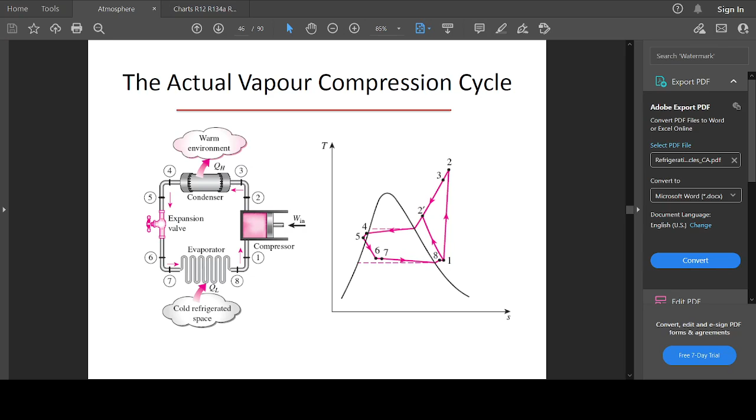Okay guys, continuation on the refrigeration cycle. So we stopped at the properties of refrigerant last time, so we continue on this lecture from here.

So what are the key properties of refrigerant? The first is the latent heat of vaporization. A refrigerant with high latent heat of vaporization is preferred. For a given capacity, a high value of latent heat of vaporization indicates that a smaller amount of refrigerant will be circulated and required per unit time, accounting for a smaller amount of refrigerant being used in the system.

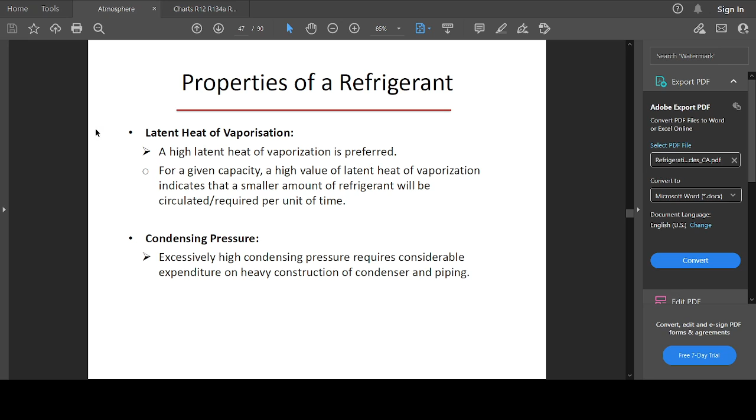Then what about the condensation pressure? Excessively high condensation pressure requires considerable expenditure on heavy construction of condenser and piping. Therefore, we need a refrigerant with a better condensing pressure quality.

What about the freezing temperature? The freezing temperature of a refrigerant should be below the evaporation temperature. And the critical temperature, the refrigerant should have sufficiently high critical temperature, as above the critical temperature the refrigerant vapor cannot be liquefied. So when using air-cooled condensers, the critical temperature should be above the highest ambient temperature expected.

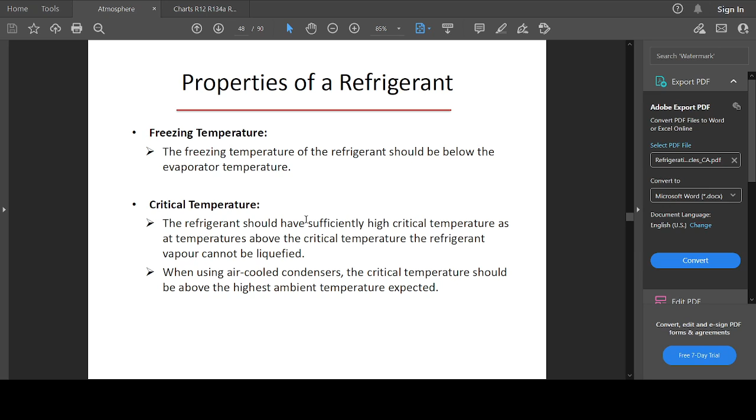The toxicity, a refrigerant obviously should be non-toxic because it helps with minimizing the level of toxic materials in circulation in terms of food handling, and in any case it gets released in the environment, it should be a material that is non-toxic, as it could cause harm and issues to people in contact with it, or animals.

Corrosiveness, the refrigerant should not be corrosive, because the materials used in the construction of the refrigeration system wouldn't last long if the refrigerant is corrosive. So the materials for the evaporators, the condensers, and even the compressors will be affected if the refrigerant which flows through these materials is corrosive.

What about flammability? The refrigerant should be non-flammable, so it should be a compound or chemical that is non-flammable. Chemical stability should be a chemical that is not reacting, an inert chemical, or one that will take lots of work to get it to react. So a compound that is chemically stable will be preferred.

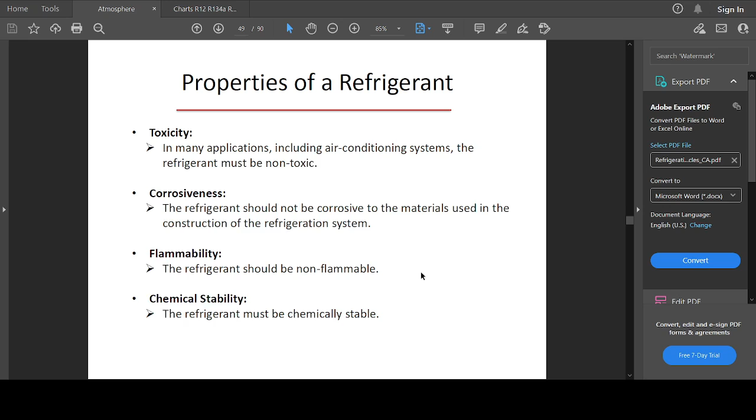So if a leak develops in the refrigeration system, the detection of such a leak should be easy. A refrigerant that makes detection very easy is preferred to one that doesn't.

So what about the cost of refrigerant? Obviously, in industrial application, a low-cost refrigerant is preferred.

And environmental impact, we touched on it with toxicity as well. It should be... although historically most refrigerants have compounds that could harm the environment, there are some refrigerants which have better performance with respect to causing harm to the environment, due to their properties.

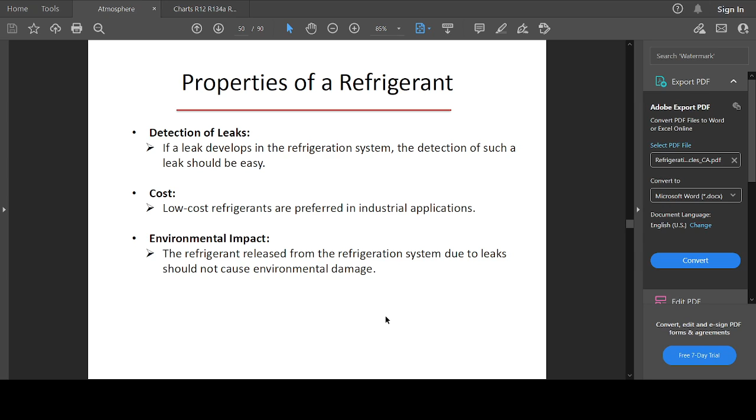So this is a standard designation given to some of the common refrigerants used in the market. We have the halocarbons. The halocarbons are the halides from the periodic table, made up of chlorine, fluorine - we know the chlorofluoro effect on the environment. The halocarbons are listed with refrigerant numbers R12, R22, R30, R114, R134A.

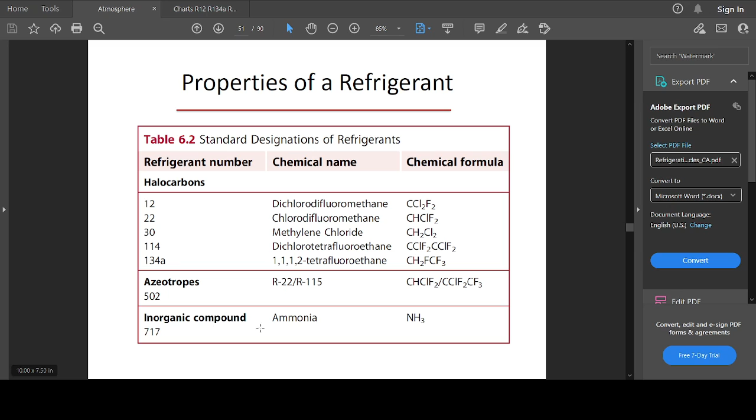So these are the corresponding chemical names and formulas for these refrigerants. Then the azeotropes are given as R502, with chemical names R22/R115, and the chemical formula given as this. The inorganic compounds, which is R717, is mainly ammonia, and the chemical formula for ammonia is given as this.

None of them is flammable apart from ammonia. Ammonia is the most flammable one, and it has an acrid odor. So if you are to detect a leak, you can use the odor to identify if there is a leak in the system.

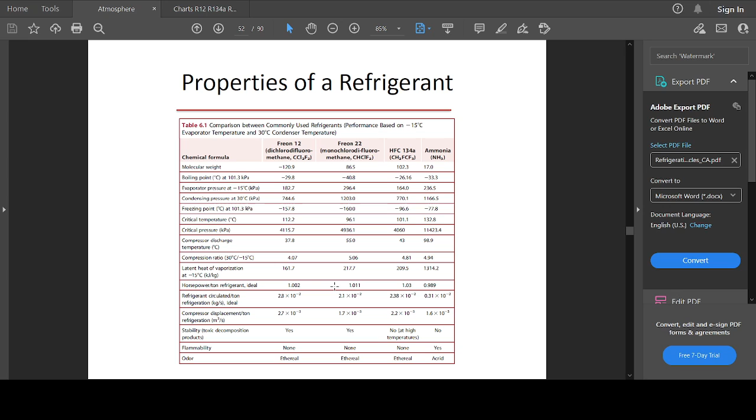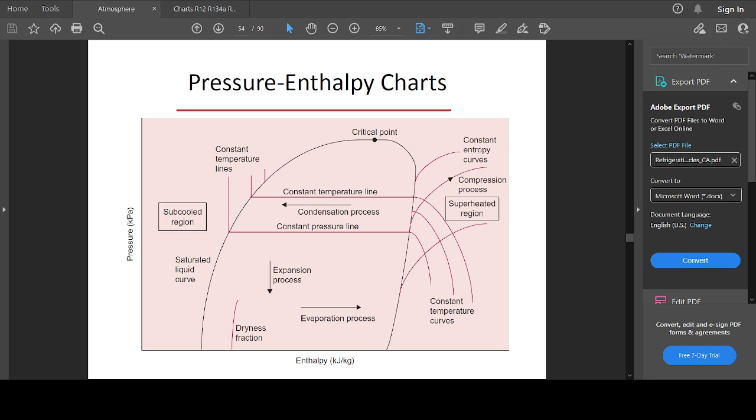We can see the solid saturated liquid refrigerant line here until the critical point, and from here we can see the saturated vapor line. Now this red line going up here gives us the superheated region. So we know that this region is superheated and this region is subcooled.

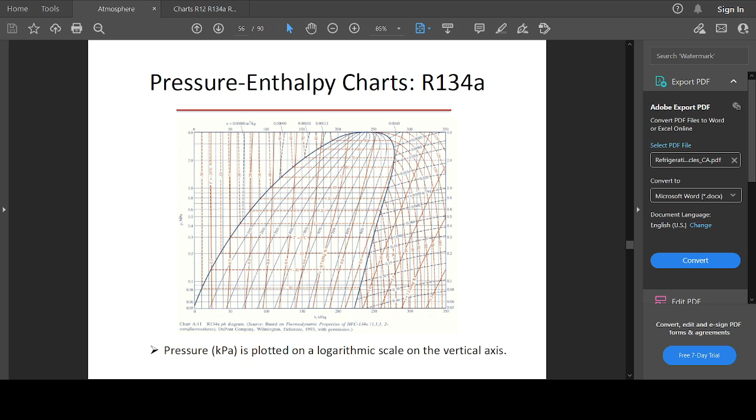So the pressure enthalpy chart may be divided into different regions based on the saturated liquid and the saturated vapor curve. In the sketch shown, the area enclosed by the bell shape here shows the area represented by the two-phase region of both liquid and vapor.

That shows you the percentages, as we can see here, which denote the dryness fraction. The horizontal lines extending across the chart show you the pressure. So the thin blue line extending across shows you the pressure, and the pressure reading here is 1 megapascal, corresponding to 1 megapascal here.

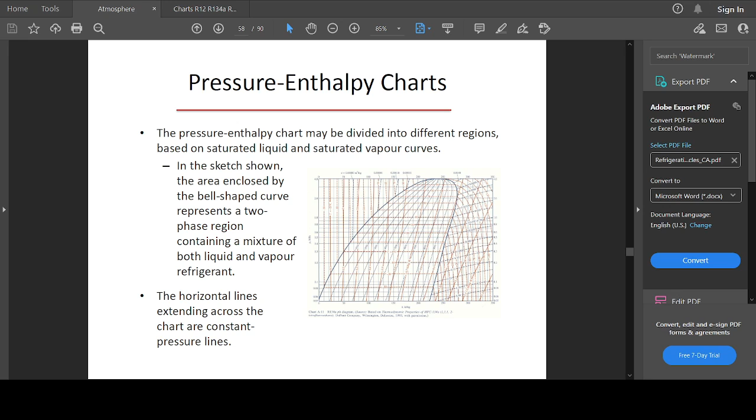And the thin line going upward vertically shows you the enthalpy. The red line that goes this way and that way shows you the constant temperature lines.

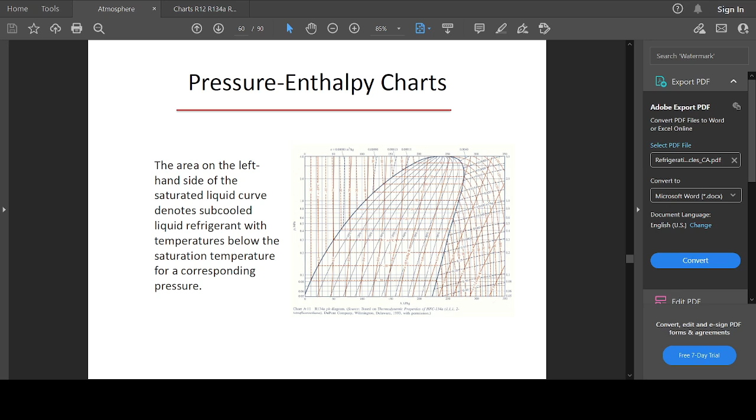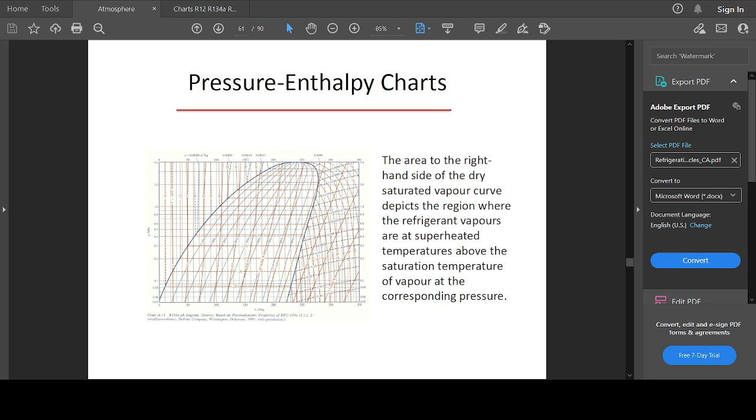So the area on the left hand side is known as the subcooled region, where the liquid refrigerant has temperatures below the saturation temperature for the corresponding pressure. And the area on the right, to the right of the saturated vapor line, is known as the superheated region, at temperatures above the saturated temperature of the vapor at constant pressure.

So within the bell-shaped curve, we have the dryness fraction, as we've already established. And this is how the full chart will look for refrigerant R134A.

Since the superheated region is crowded with a number of curves, an expanded portion for that region is more convenient to use to draw process 1 and 2.

So that expanded process could be plotted. You can plot this from the superheated line, the superheated section. So processes 1 and 2, which is a compression process.

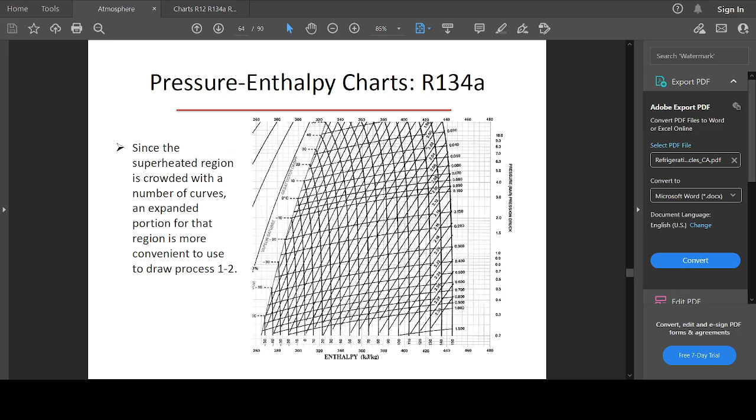So in case of calculation, assignment, or exam, for any particular refrigerant given to you, the corresponding tables and chart will be given to you as well for your calculations.

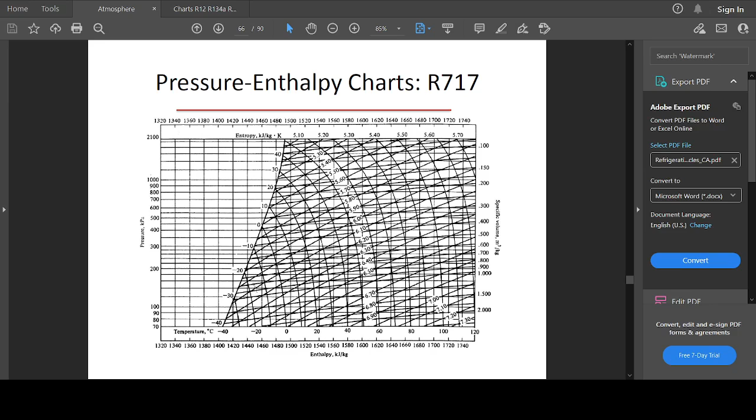We can read out the details for these stages, stages 1 to 4, from the chart, or we can use tables, just like the steam tables, presented for properties like enthalpy, entropy, density, absolute pressure and temperature for this refrigerant. We can also read values from the table, but it's always advisable to sketch it out on the chart, because it's usually very easy to find the compression side and the figures from the chart.

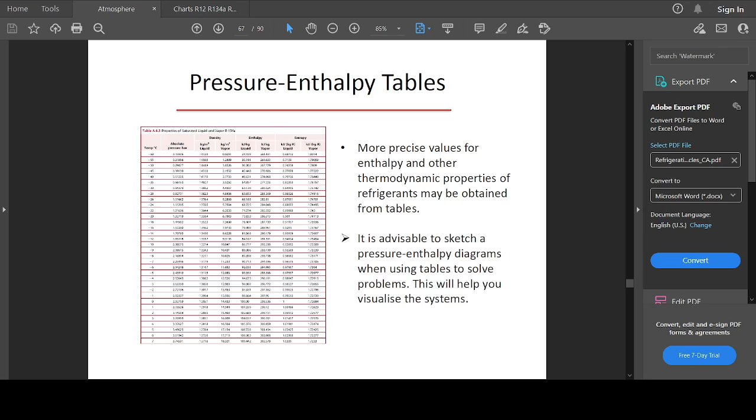So another approach to determine the thermodynamic properties of refrigerant is to use computer-aided methods with empirical correlations. For more details on this subject, you can consult this textbook to extract the information for the computer-aided empirical correlations.

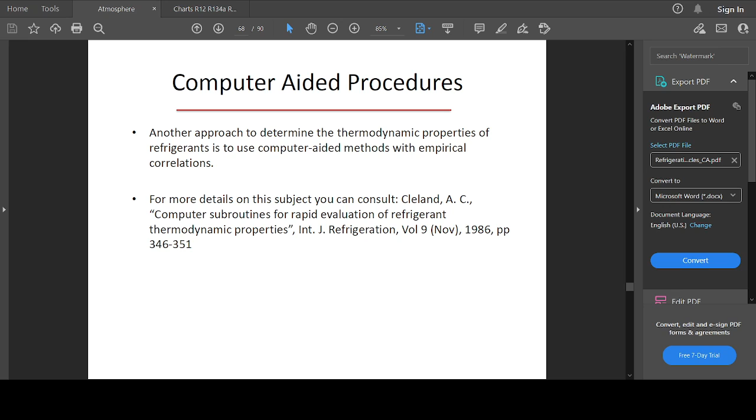Example: a cold storage room is being maintained at 2 degrees Celsius using a vapor compression refrigeration system that uses Freon R134A. So the refrigerant is R134A.

The evaporator and the condenser operate at -5 and 40 degrees Celsius. So -5 is the low temperature and 40 degrees Celsius is the high temperature, for the evaporator and condenser respectively. The refrigeration load is 20 tons. Calculate the mass flow rate of refrigerant, the compressor power requirement, and the coefficient of performance.

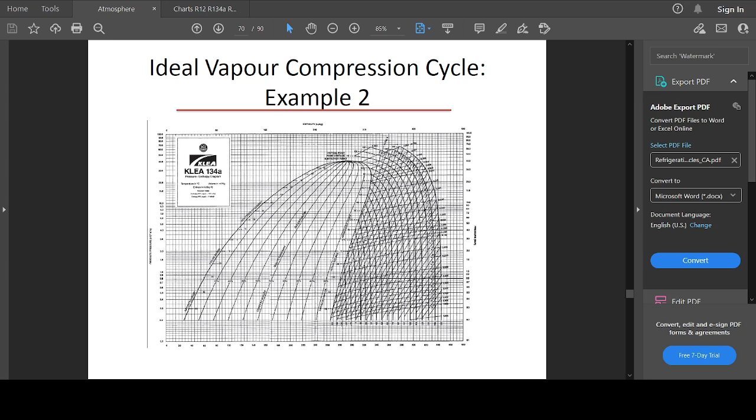Assume that the unit operates under saturated conditions and the compressor efficiency is 85%. So using the table for refrigerant R134A, with the known temperatures for the evaporator and condenser, we can plot this cycle on the chart.

So plotting this cycle on the chart, we go for a temperature of -5. What is the equivalent temperature of -5? If you look here, this is -10, and here this is 0 degrees. So the distance between -10 and 0 degrees here is 5 degrees, giving us -5.

So we draw a line from here, a straight line. That's the easiest way to do it. Now we go to 40 degrees. So this is 0, 10, 20, 30, 40 degrees. The condenser operates at 40 degrees, so we draw another straight line for 40 degrees.

Now, because we are here, we have to draw another line to show the compression side of things. Once we draw these two lines, we draw a straight line from the top here to the bottom. We can delete the line here, and this gives us this section sorted. But what about the superheated, the compression side of things?

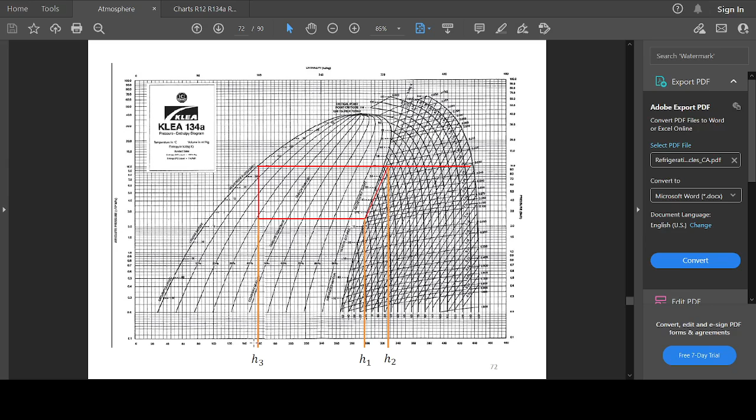So we read out H3 here. So from 40 degrees, we go down to this point, and this is 140, 150, 160, so almost 160.

So we go down, we take 160 as a clear approximation, and we know that H3 and H4 are the same.

Now we know that at stage 1, we have a saturated vapor, and at stage 2, we have a superheated vapor. At stage 3, we have a saturated liquid, but at stage 4, we have a saturated liquid vapor mixture.

So since we have arrived at this, we can find the total heat in. So the total heat in is between these two places, the change in enthalpy between H1 and H3 or H4, because they are the same, and that gives you the total heat added.

Then the work done by the compressor, between points 1 and 2, that gives us the change in enthalpy, and we arrive at minus 31.

So the heat out of the condenser, which happens between stages 2 and 3, is giving us H3 minus H2, and we have minus 167 kilojoule per kilogram.

Then the refrigerant flow rate: we know that the total heat in is the heat load as given in the question. It says that the refrigeration load is 20 tons.

So if we know the refrigeration load as 20 tons, then we multiply it by the value for one ton of refrigeration, and it gives us the total power for refrigeration.

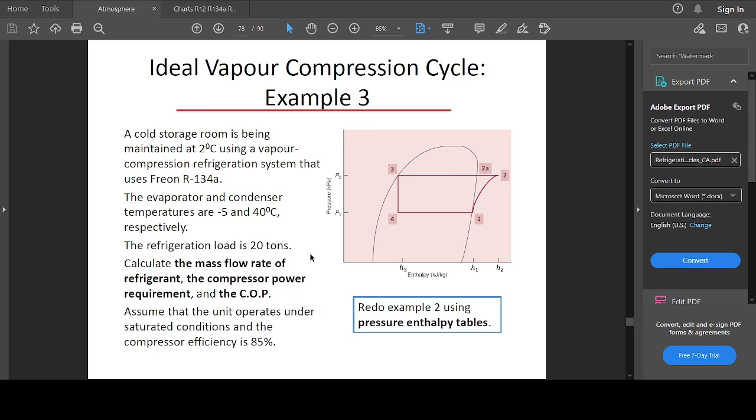So if we do so, from the table reading, and in this case, we have R134A.

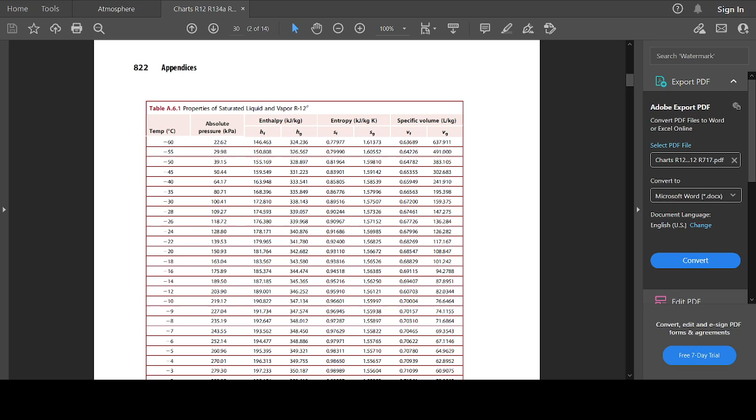R134A, as you know, I will attach another table.

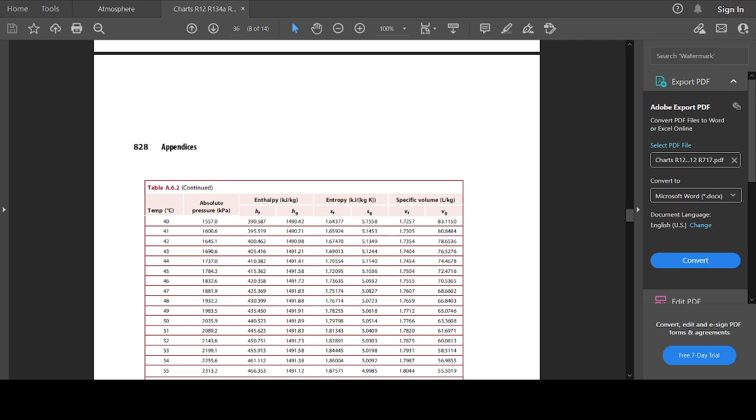So this is R134A. So what are the questions? So we have at -5 degrees Celsius. The corresponding H1, which is Hg, that would be 295.59.

So on the R134A table, at -5, where is it? -5. So this is the enthalpy of the vapor.

So if we trace it down, okay, see -5, we go to enthalpy and it gives us 295.588, which we have here as 295.59.

Then the superheated section, we get from the graph. So this is the importance of the graph. Okay, we always use the chart, the graph chart, for the superheated section.

But for the saturated vapor and saturated liquid line, we can get that from the graph if you want, but you can also go to the table to get this as well.

So for 40 degrees Celsius, you can go to this table under 40 degrees Celsius, then you can read out the corresponding figure for the saturated liquid line.

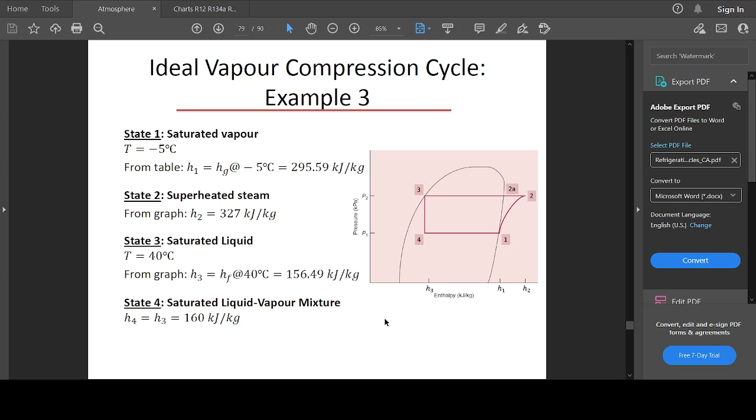So yeah, so this now is equivalent. Where is H3? H3 is the same as H4. Okay, so you can carry on with this.

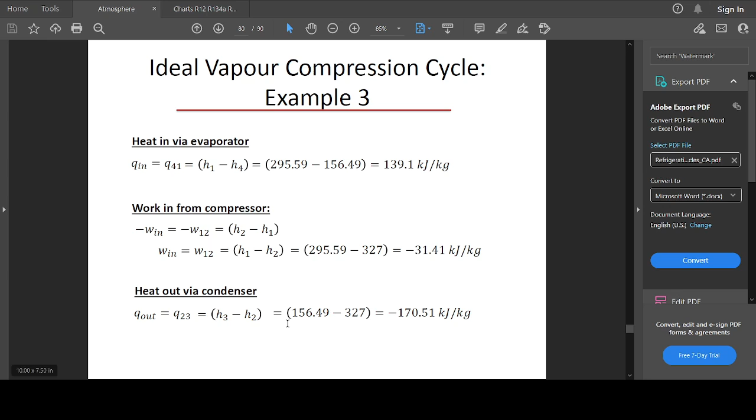Okay, so you do a similar thing we've done before to calculate the total heat added to the system, to the evaporator, and we do the same for the compressor. And you see that the values, the figures, are very, very identical to each other. Then you do the condenser heat removed from the condenser, and we do the heat load.

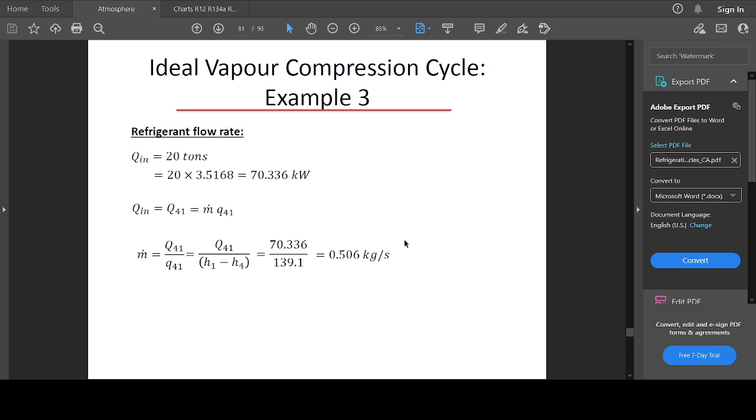And with the heat load, you can calculate the flow rate of the refrigerant, and you can see that the figures we arrive at here are similar to the figures we arrived at using the chart. Although there are minor changes, the changes are not much.

So we do the same for the work requirement, the power requirement for the compressor, and we do the coefficient of performance, and we arrive at similar values. So these are the two ways we can use to do this calculation for the refrigeration cycle, for the ideal vapor compression cycle.

With this, you now know how to use the charts to do the calculations, and also how to use the table. So I implore you to attempt the tutorials. This is similar to what we've been doing before using the steam table and things like that. But this one is a lot easier because you can easily get the figures and plug them into the calculations and on you go.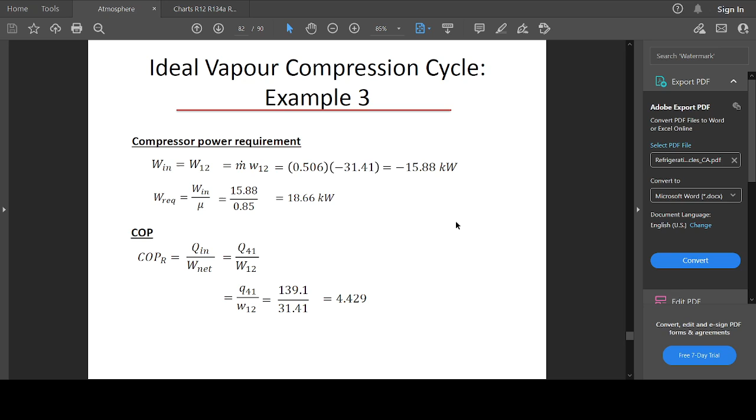So with that said, we can move on to the multi-stage system. What are the multi-stage systems? These are systems that involve using more than one compressor, often with an objective of reducing the total power requirement. Although adding additional compressors requires an increase in capital spending, the total operating cost must be reduced for the multi-stage system to be justifiable.

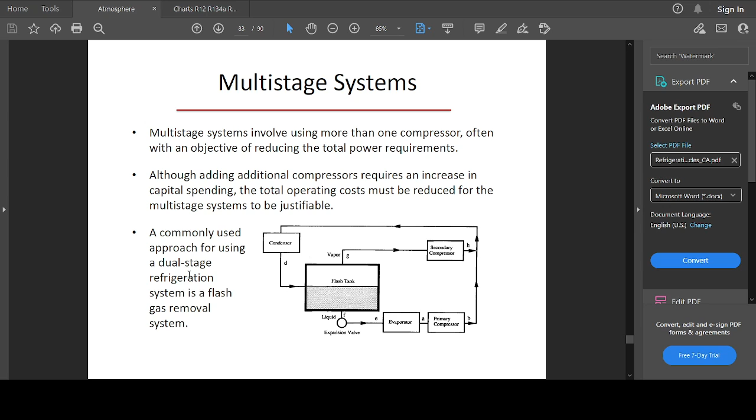So a commonly used approach for a dual-stage refrigeration system is a flash gas removal system. In this case, you have the flash gas removal system in order to improve the refrigeration system.

As shown previously, refrigerant leaves the condenser in a saturated liquid state, and in the expansion valve there is a pressure drop from the condenser pressure to the evaporator pressure.

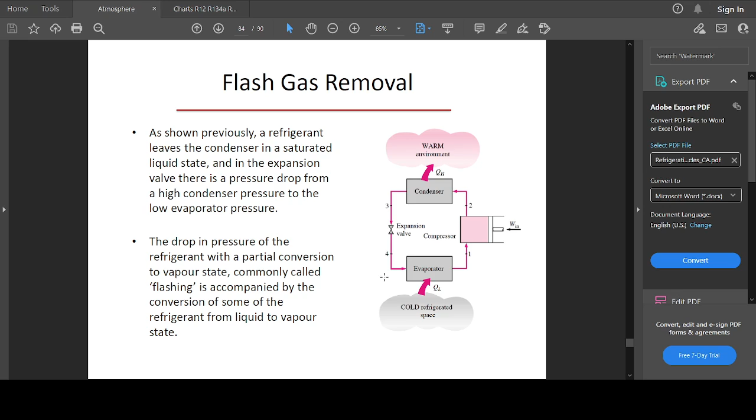The drop in pressure of the refrigerant, with a partial conversion to vapor state commonly called flashing, is accompanied by conversion of some of the refrigerant from liquid to vapor phase at this stage before it goes into the evaporator. So at some intermediate pressure between P1 and P2, the refrigerant exists partially as vapor but mostly as liquid.

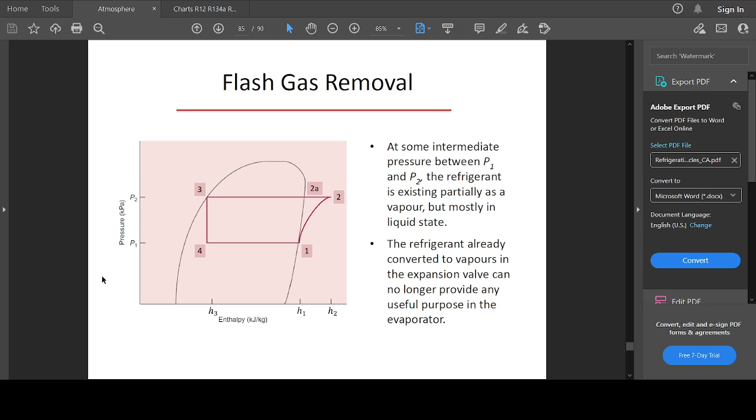The refrigerant already converted to vapor in the expansion valve can no longer provide useful purpose in the evaporator. So to increase efficiency, a flash tank can be used to separate the vapor from the liquid while the pressure drop occurs.

Then we can take the vapor and compress it with another small secondary compressor to the condensing pressure. So we bypass taking that vapor from the flash tank, through these processes, into the second compressor, and push it back into the line.

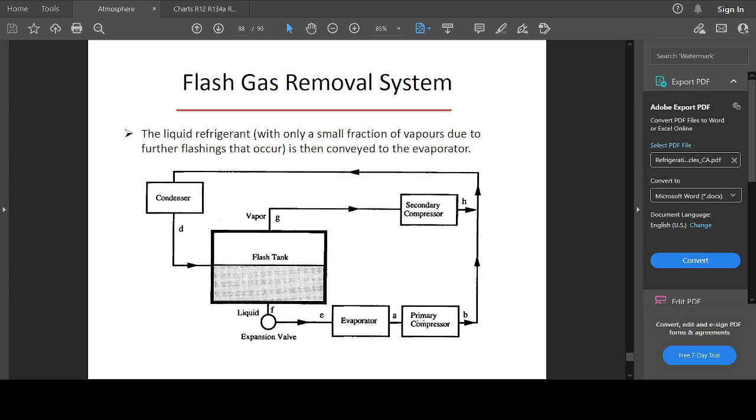So the liquid refrigerant, with only a small fraction of vapor due to further flashing that occurs, is then conveyed to the evaporator, and leaving the evaporator, it goes into the primary compressor.

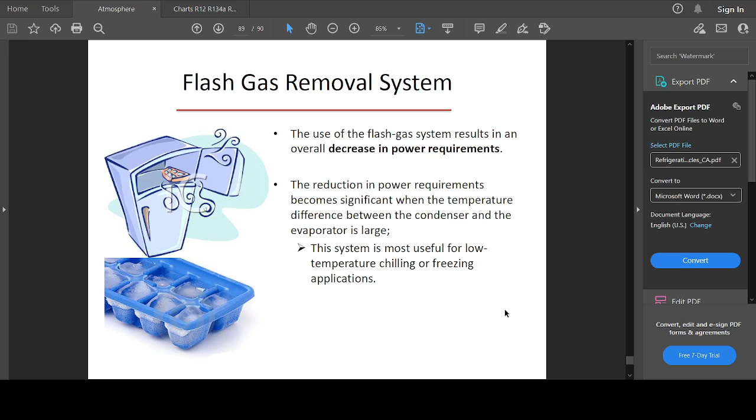So the use of a flash gas system results in an overall decrease in power requirement, and the reduction in power requirement becomes significant when the temperature difference between the condenser and the evaporator is large. So this system is most useful for low temperature chilling or freezing applications.

The secondary compressor required for compressing the flash gas is usually small, and the primary compressor is also usually smaller than in a standard system that does not remove flash gas. Since most of the flash gas is removed, and the gas has significantly larger volume than liquid, the piping used for intake and exit of the refrigerant from the evaporator can be smaller.

So the additional cost of the flash gas system includes the need for a secondary compressor, although small, a flash gas tank, and associated valve piping and fittings.

So this is the end of the refrigeration cycle, and by now you should have all you need for the calculations. I will also advise and implore you, for personal reading, to go further, make use of the textbook to see if you can attempt to generate the values using the computational method with the figures and equations that may be provided to you in the textbook.